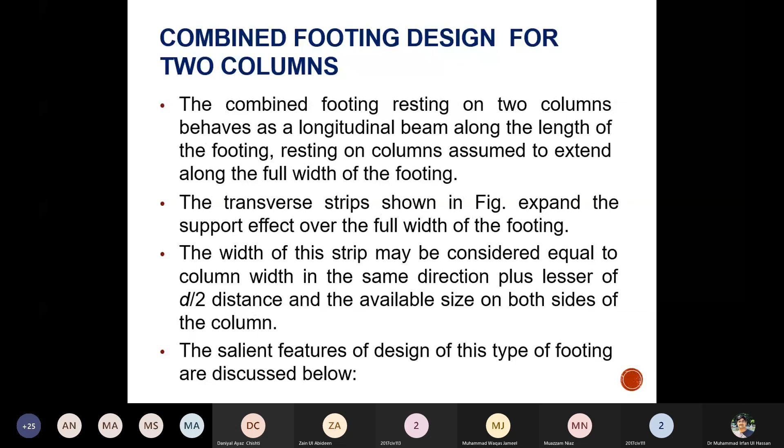As you can see in this figure, the combined footing is made by the 2 columns. We try to make the resultant in such a way that the resultant of all the forces, which is the sum of the load acting on column 1, P1, and the load acting on column 2, P2, should be equal to R, and the resultant is passing through the centroid.

So we have to set the dimensions depending upon the given conditions at the site, how much footing can be extended beyond the columns on one end and on the other end, and then we can provide more projection on the other side of the column if there are restrictions on one side. So we set the dimensions in such a way that we determine the location of the resultant, and the resultant must pass through the centroid of the footing. It means that if the footing length is L, then the resultant must pass through L by 2.

Similarly, in the transverse direction, we mainly provide more steel in the transverse strips, which are shown in the figure. C1 plus D is the width of the transverse strips. So here the larger amount of steel is there because in the transverse direction the bending is mainly produced in this region, and in the other region we can go with nominal steel.

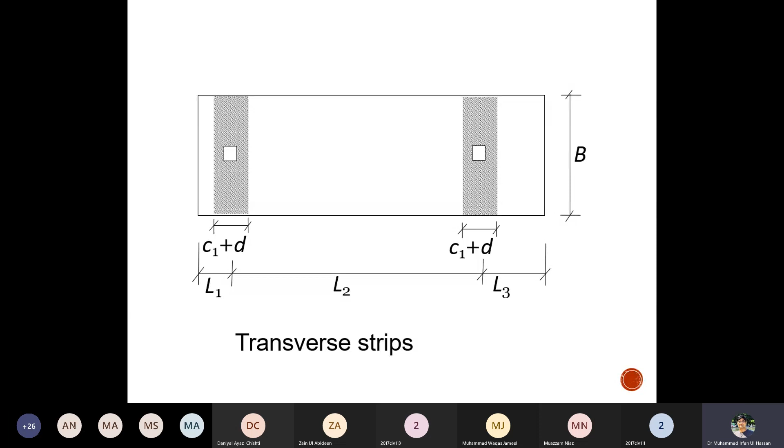Important point is that the centroid of the combined footing must coincide with the location of the resultant load on the footing. So how is it possible? This makes the resultant moment of the footing transferred to the soil equal to 0, which produces uniform pressure under the footing and avoids tilting of the foundations.

You know that when I am applying the force on some area and I pass it through the centroid, then there is no unbalanced moment. When there is no unbalanced moment transferred to the soil, there is a uniform pressure under the footing. So the reason is the uniform pressure development under the footing. That's why the sum of the moments of the resultant and the sum of the moments of its components should be equal, as per Varignon's theorem.

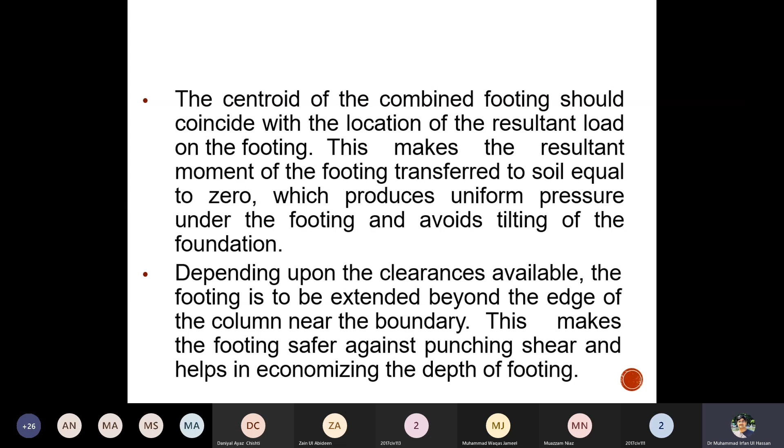So depending upon the clearance available, the footing is to be extended beyond the edge of the column near the boundary. This makes the footing safer against punching shear and helps in economizing the depth of the footing. We can try to extend the footing beyond the column on all sides. If the space is not available, then it is not possible. But if it is available, a larger punching perimeter can be obtained and we can avoid the punching shear.

The distance between the shorter edge of the footing towards the column closer to the boundary and the resultant of the load is evaluated. The footing is longitudinally extended on the other side of the resultant by the same distance. So first, locate the resultant from one side of the footing, and then provide a similar length after the location of the resultant. Let's say the resultant is obtained at some distance x, so we multiply that x by 2 and that will be the length of the footing.

The required area of the footing is also very simple. The length is determined from that expression, and the area of the footing is similar: the total load divided by the allowable bearing capacity.

So in this way you can obtain the width also, because the length is determined from the Varignon theorem application, by making the resultant pass through the centroid, and the width is determined by the area required divided by length, because area is B into L. So what is the area required? The area required will be the total service load for the two columns, or even more than two columns, divided by the allowable net bearing capacity.

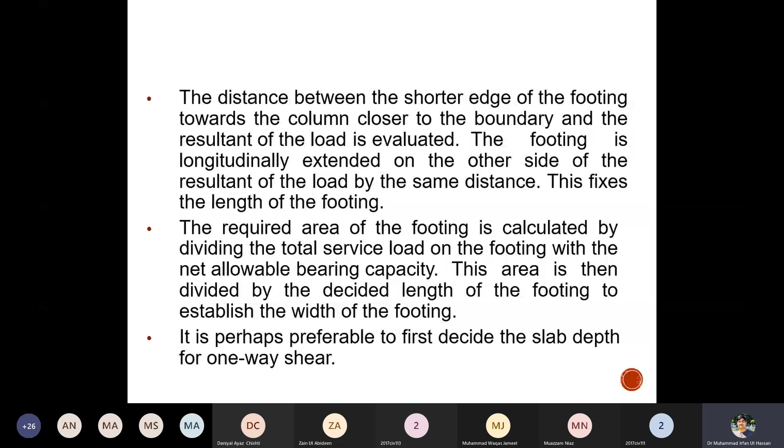Then you decide the thickness of the footing, compute the shear force and the bending moment, and design the footing. The depth is first computed from the one-way shear criteria. The depth is then checked for the punching shear criteria. We can reduce the live load, but no need to take the pattern loading, because pattern loading is adopted for getting the critical moment and shear in the members, and no need to apply it in the footing, because the live load is normally a smaller part of the total load for the concrete structure, and the effect of the pattern load is normally finished before reaching the footing level.

So pattern loading is not taken, but you can reduce the live load in case of the footing design. The reason is that normally the building is not fully loaded all the time, so you can apply a 20% live load reduction factor in case of the foundation design. So a longitudinal section of the footing is considered first of all, and the columns are considered as the supports. The longitudinal section of the footing behaves like an inverted beam, where the UDL is acting upward and the column load is acting downward.

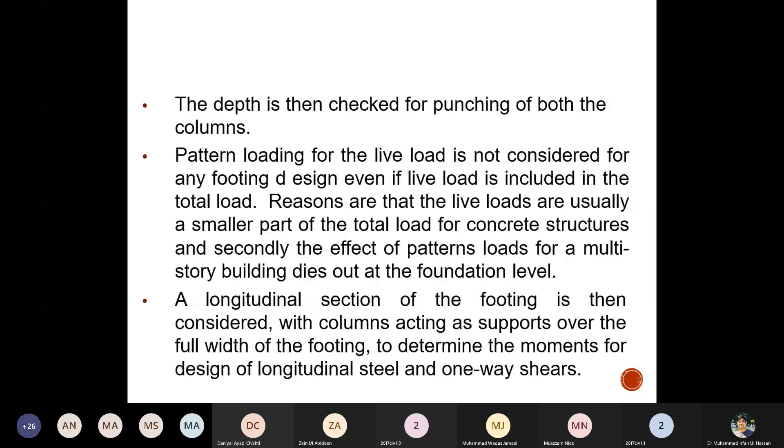But if the columns are very close to each other, then it is even possible that tension is developed throughout the top. The reason is that the overhang length beyond the columns is so small that there is no possibility of developing tension in the bottom, and as a whole the footing shows hogging behavior throughout the length.

So it means that larger top steel will be required for the foundations. Under the column normally bottom steel is needed, and at mid span between the columns top steel is needed along the length, whereas along the width the band bends just like an isolated footing, so tension is produced at the bottom side. So in the transverse direction, bottom steel is needed along B.

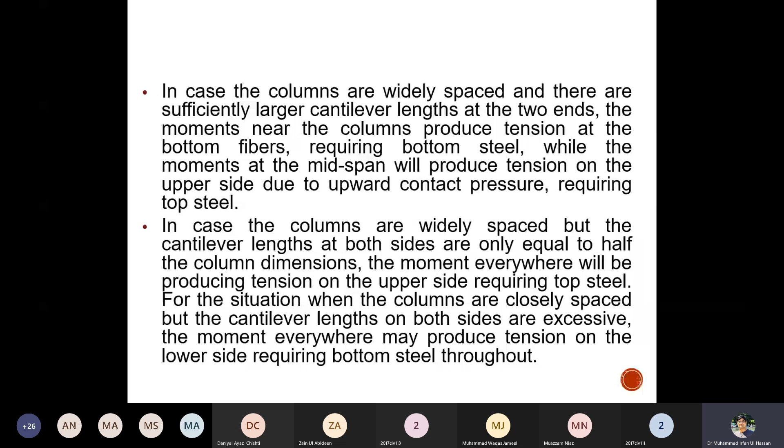The load acting on the footing is equal to the width of the footing multiplied by the net contact pressure. So pressure multiplied by the width gives you the UDL, because when you are designing the longitudinal direction of the footing, you need a UDL. So how to get the UDL? Pressure multiplied by the smaller dimension, the width of the footing. Then you can design it along the length.

The shear and bending moment are plotted and critical shear is determined. The point of inflection, the point of zero shear, the point of maximum negative moment and the point of maximum positive moment are determined, and then you can design the foundation for flexure. Apply the shear check and then design the foundation.

You can consider the column load as a point load normally, but in some cases when the column size exceeds 2-3 feet, I think it is better to take the real scenario. The real scenario is that the column is acting throughout its width, so you can consider that load as a UDL. So sometimes the column load is considered as a point load and sometimes as a UDL.

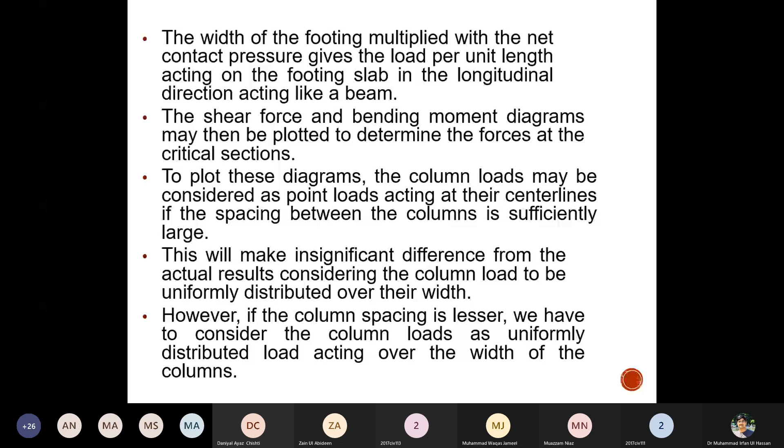Transverse bending moment is also computed in the transverse band width, similar to the isolated footing procedure, and tension is developed at the bottom due to the upward loading in the transverse strip.

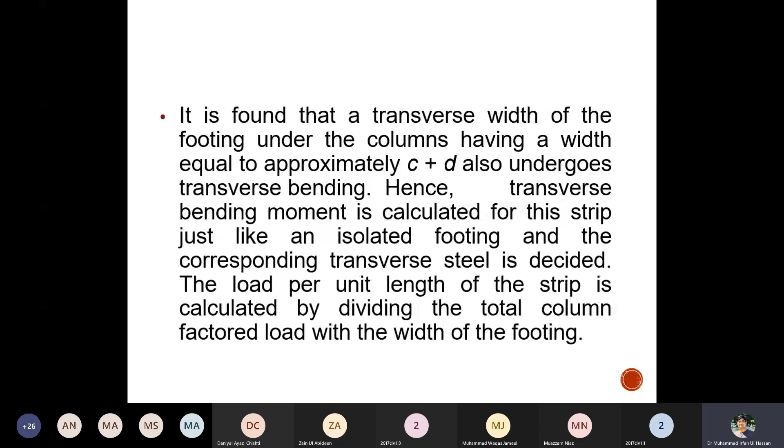Now the length of the footing is calculated by using Varignon's theorem, that the moment produced by the resultant of forces should be equal to the sum of the moments produced by its components about the same point. So the equation becomes R into X equals P1 X1 plus P2 X2 and so on. From that you can determine the X value, the location of the resultant, because all the point loads and moment arms are known. The resultant location can be found, and the resultant must pass through the centroid of the footing. In this way, uniform pressure will be developed under the footing.

Let's say there are two columns and you want to find the location of the resultant as X bar. So the first case is this: there are two columns. Now you can select any point about which you can take the moment. It can be the left edge of the footing or the right edge of the footing, whichever is known. Let's say we know the distance on the left side, or our column is at the boundary, so we can take the moment at any known point. Normally one column center point is known. So we can take the moment at the center of the left column where P1 is acting.

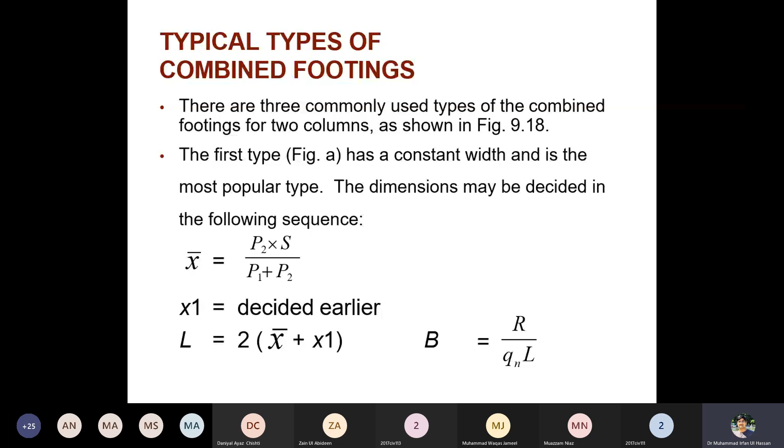So in this way, the length is located and you then compute the area of footing required, which is equal to the load over the net allowable bearing capacity Qn. Area is L into B equals R over Qn, and when L is already known, you can easily compute the B value. So first L by 2 is determined, then the length is determined, then B is determined.

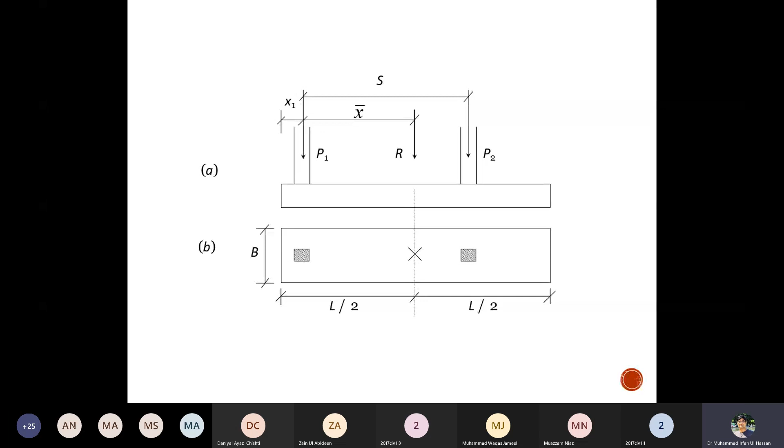Whatever the design of the combined footing, the important point is that you get a UDL under the footing. To get the UDL, you know the centroid of the footing and try to pass the resultant through it. So you have to adjust the dimensions L1, L2, B1, B2. Once the location of the resultant is known, all the dimensions can easily be adjusted. How? You know X bar plus X1 because the location of the resultant is computed from Varignon's theorem.

This gives you the L1. Now the area which is bounded by the L1 and B1 zone, the same area should be bounded by the L2 and B2 zone in this case.

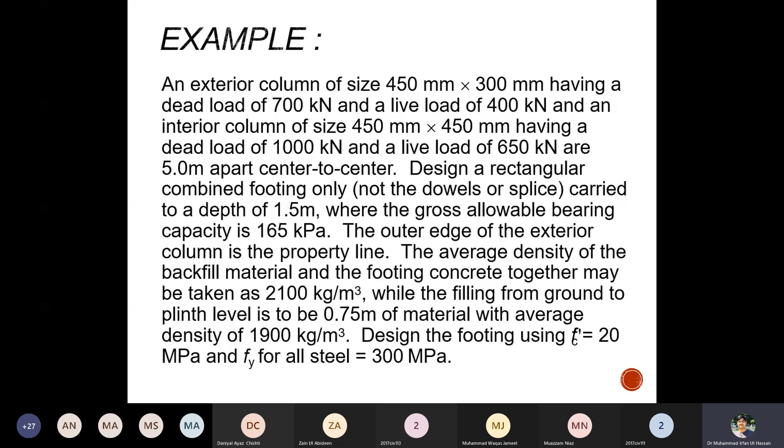This was all about the lecture. If you have any question, you can ask related to the foundation design, combined foundation design. Next, we are starting with the problem of the combined footing.